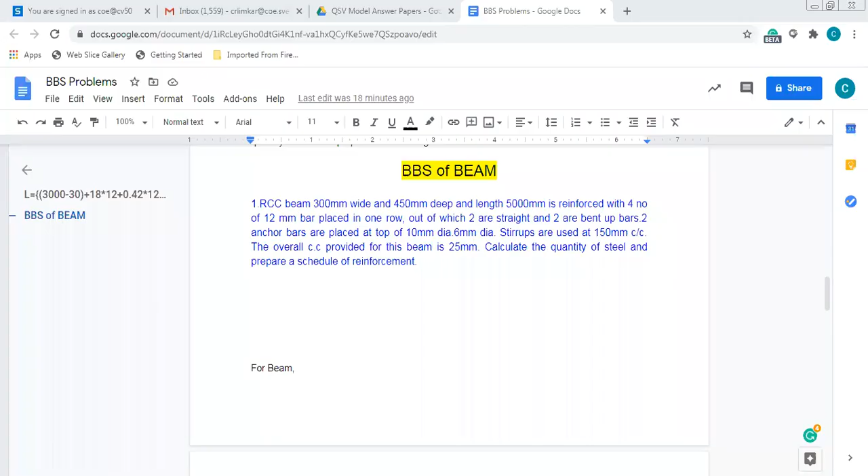An RCC beam 275 mm wide. You can note down this next, second problem, those who have joined the session.

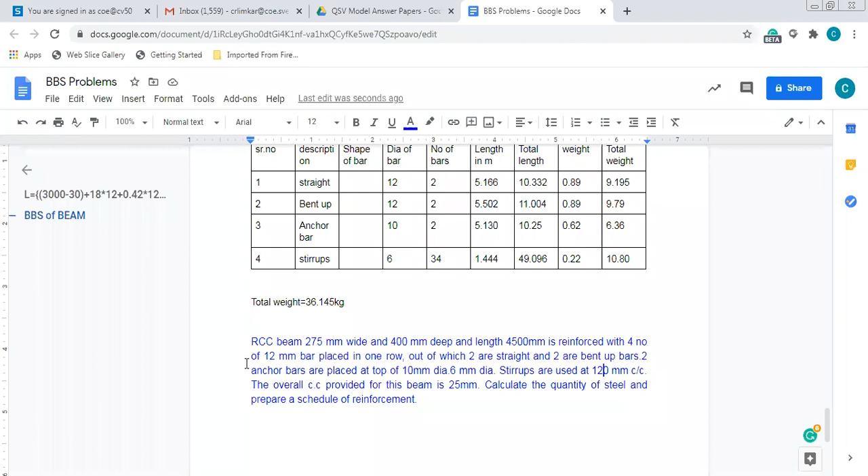So this is your problem number 2. Please note down the problem and try to solve it.

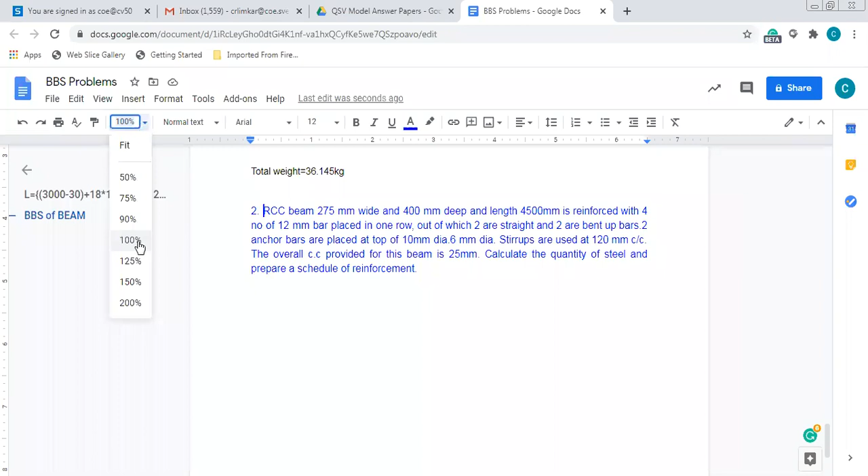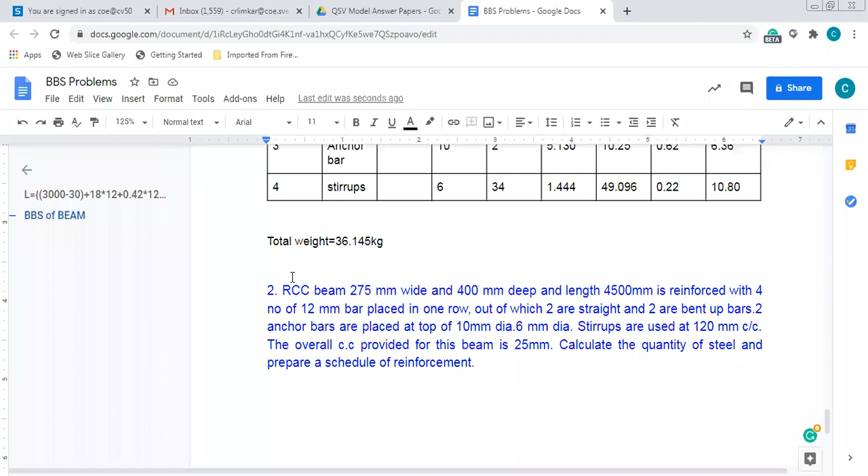An RCC beam 275 mm wide, 400 mm deep, and length 4500 mm is reinforced with four number of 12 mm bars placed in one row, out of which two are straight and two are bent bars. Two anchor bars are placed at the top of 10 mm dia. 6 mm diameter stirrups are used at 120 mm center to center. The overall clear cover provided for this beam is 25 mm. Calculate the quantity of steel and prepare the schedule of reinforcement.

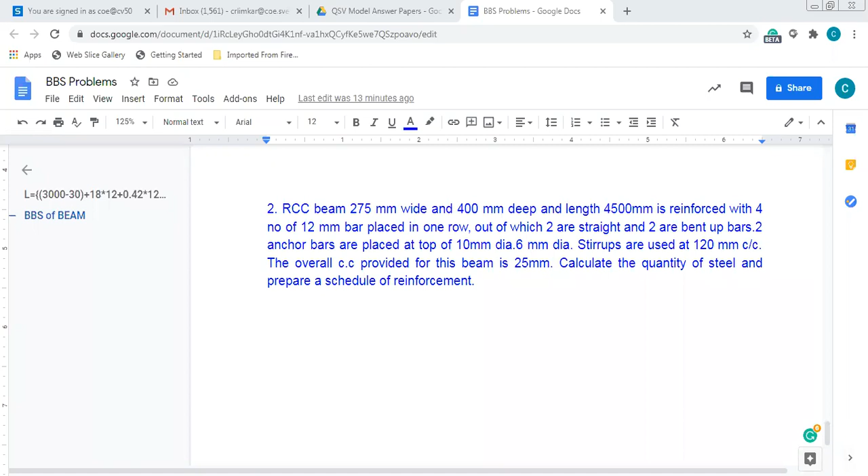An RCC beam, you can note down this problem also. An RCC beam 230 by 300 mm and length 3 meters is reinforced with 3 number of 12 mm main bars placed in one row. Out of 3, 2 are straight and 1 bar is bent up. In addition to this, 2 anchor bars of 10 mm dia are provided at the top. 6 mm stirrups are provided at 150 mm center to center. Clear cover is 20 mm. Calculate the quantity of reinforcement.

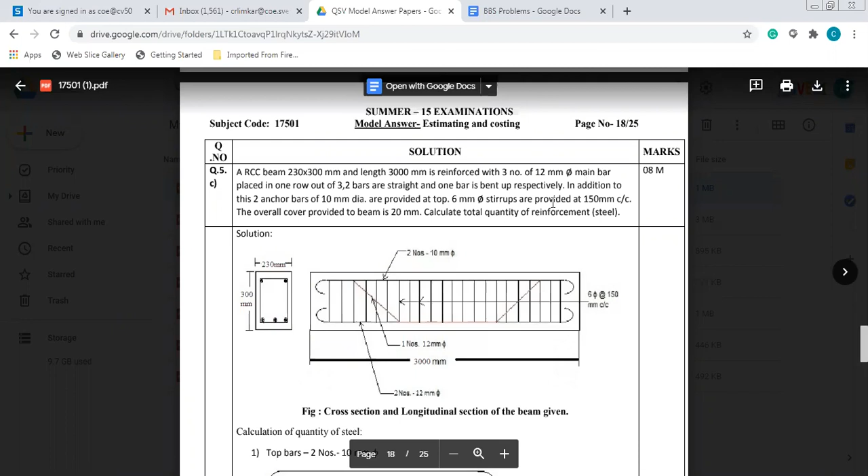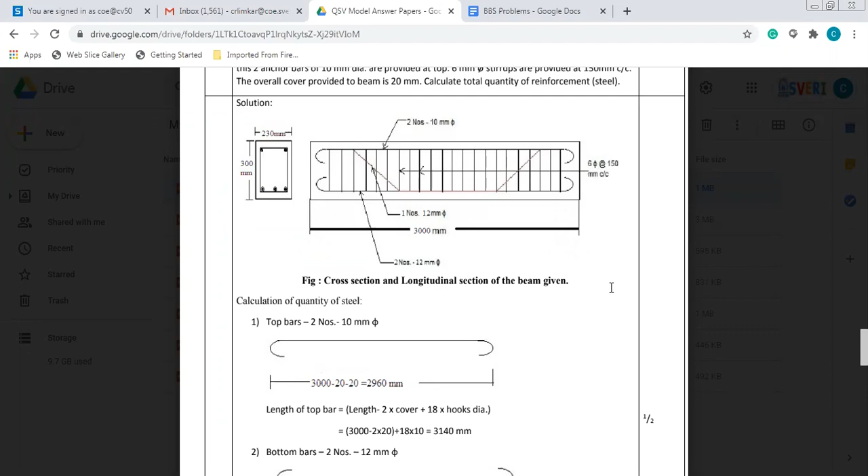I will just cross check. Length of top bar is 3140, correct? Okay. Then bottom bars 3176, correct. After that,

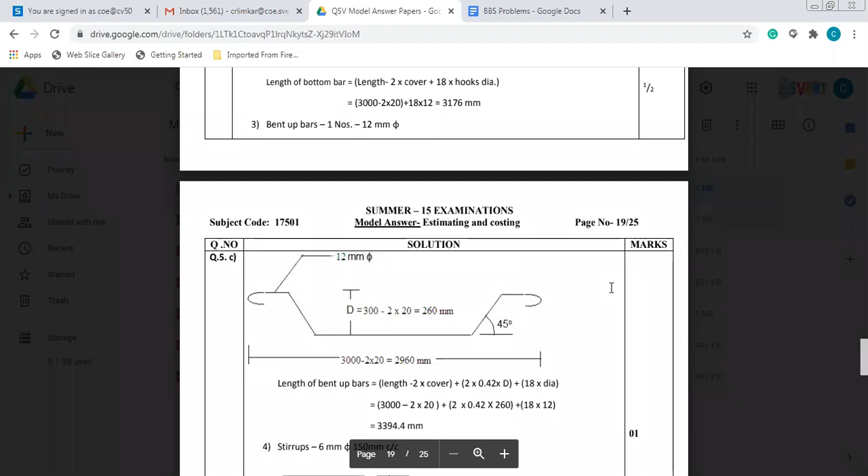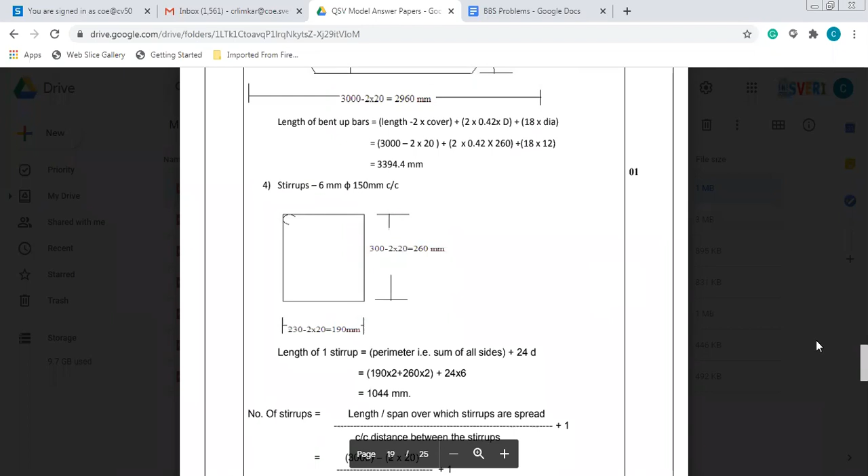Bent up bar's length is 3394.4 mm, you can calculate. Stirrup length is 1044, not 1004. Please check your calculations. And number of stirrups will be 21.

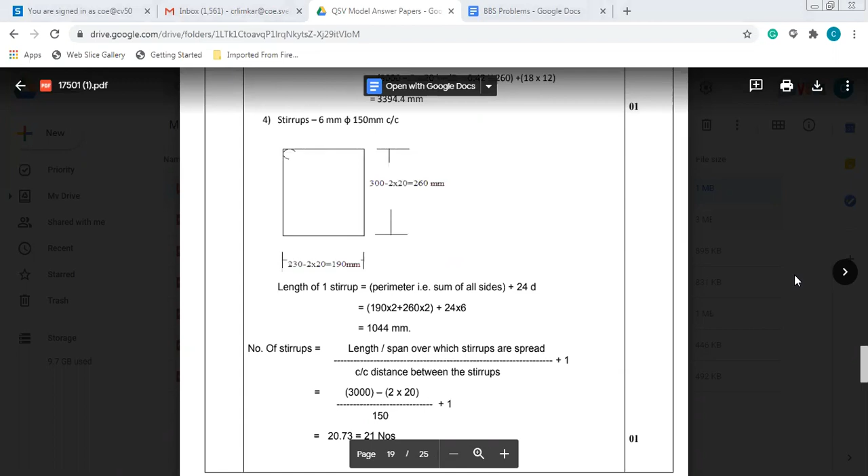That is correct. Okay, total weight of the steel which is required for this particular problem. Everyone, please calculate the total weight of steel which is required.

Calculate the total quantity of steel that is required. Everyone, please calculate the quantity of steel that is required for this problem so that we will proceed further.

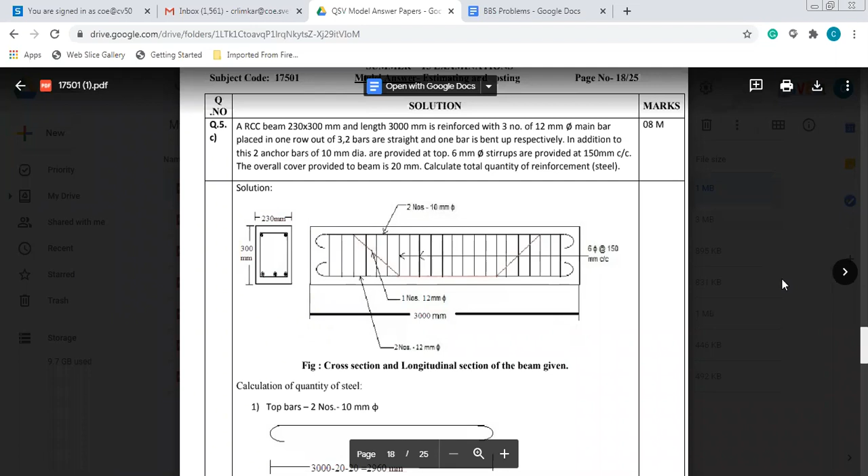Total weight of steel is 17.29 kg. Please check your answer.

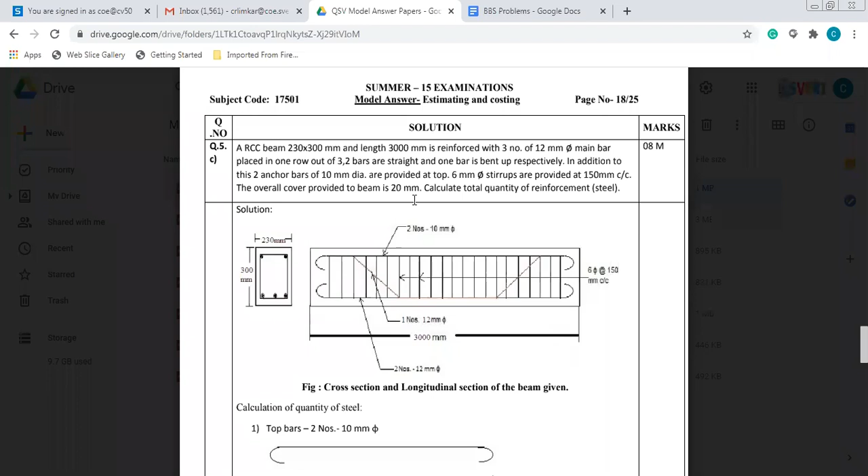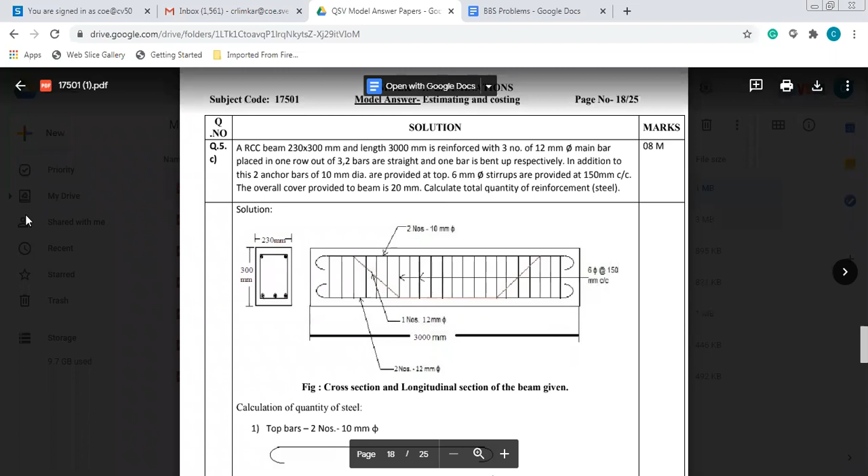I will take the next problem. Okay, I will check whether it is available with you. I will share, don't worry. Wait for me.

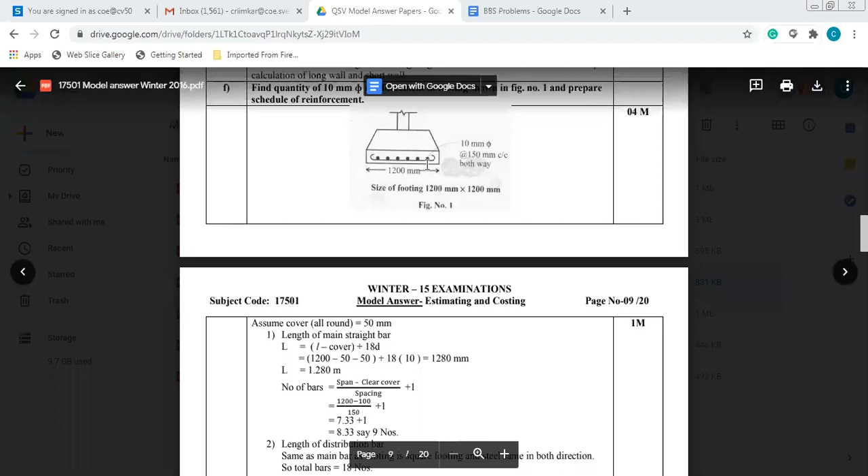Okay, you can note down this next problem, that is of the footing. Find, I will just correlate. Find quantity of 10 mm diameter reinforcement in the footing shown in the figure and prepare the schedule of reinforcement. Now this is the problem related with the footing, that is calculating the quantity of footing.

See, the diagram is given. You can draw the diagram for your ready reference. And we will start with this problem.

There is a footing having the size of 1200 mm by 1200 mm, that is 1.2 meter by 1.2 meter. 10 mm diameter bar is used. Then spacing is nothing but 150 mm center to center, and that is both way. It is been clearly mentioned.

Okay, clear cover. Now as it is a footing, what is the clear cover? You can take the clear cover as around 50 mm. That is being assumed in this particular problem. So clear cover for this footing problem is 50 mm.

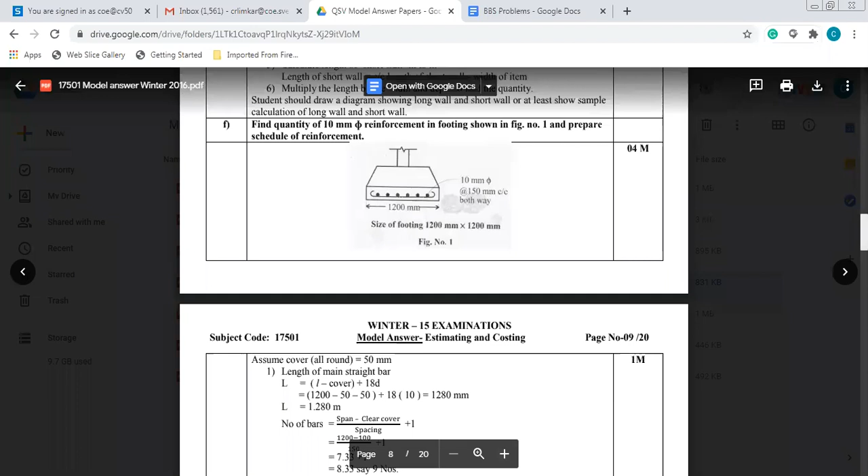Now how to calculate the length of main bars? Length of main bar, again our regular formula, that is for the straight bars. I will use the pointer so that you will understand.

See, length of main bar, this is your main bar. Have you seen this hook is there? This is nothing but your length of main bar. How to calculate this length? Again, use the simple formula.

Length of main bar equals to length minus the clear cover plus 18 into diameter of the bar. Length is 1200 mm, from the diagram you can easily identify it. Clear cover is 50, so 2 into 50 plus 18 into diameter of that straight bar which is 10 mm, as given in the problem. So length of main straight bar is 1280 mm.

That is 1.280 meter. Then number of straight bars that is required. Now how to calculate this number of straight bar, which is mentioned in the next one.

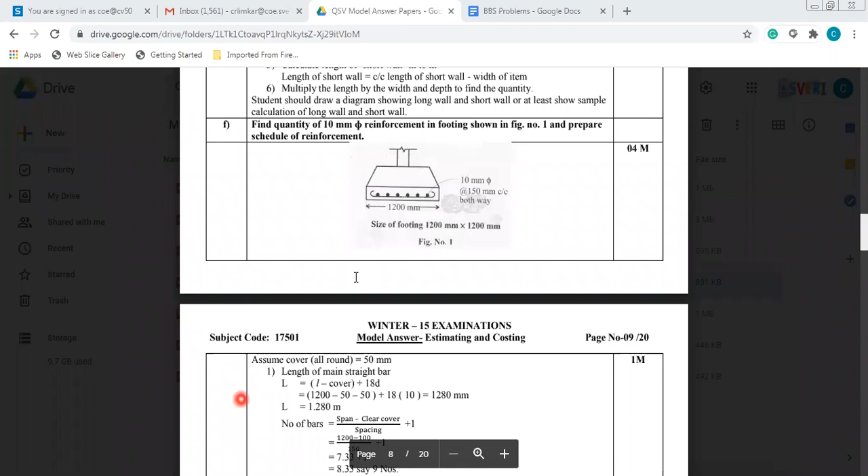Number of straight bars will be equal to span minus clear cover divided by spacing, plus 1. We have already discussed this formula in our previous problems. Total span is 1200 mm, minus clear cover of 50 mm from both sides, that is 2 into 50, divided by spacing. So number of bars comes to 8.33, that is around 9.

Now our next step is to calculate the length of the distribution bar. What will be the length of distribution bar? It is same as the main bar. Why? Because the footing is square and has the same dimensions, 1200 mm by 1200 mm.

So length of distribution bar equals to, again the formula will remain same, length minus clear cover plus 18d. Length is 1200 mm, clear cover is 50 from both sides, plus diameter is 10 mm. So 1200 minus 50 minus 50 plus 18 into 10, that is 1280.

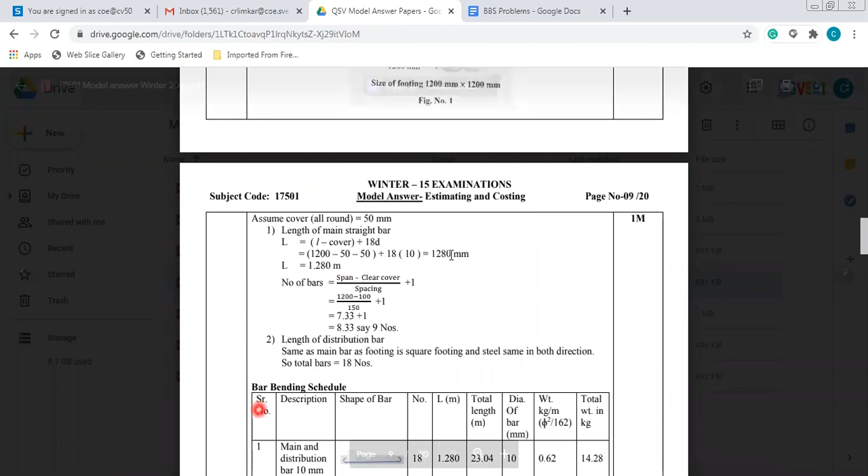So the length of distribution bar will again remain same because it's a square footing, as you can see in the diagram, having the size 1200 mm by 1200 mm. If it is different, then you need to calculate it separately.

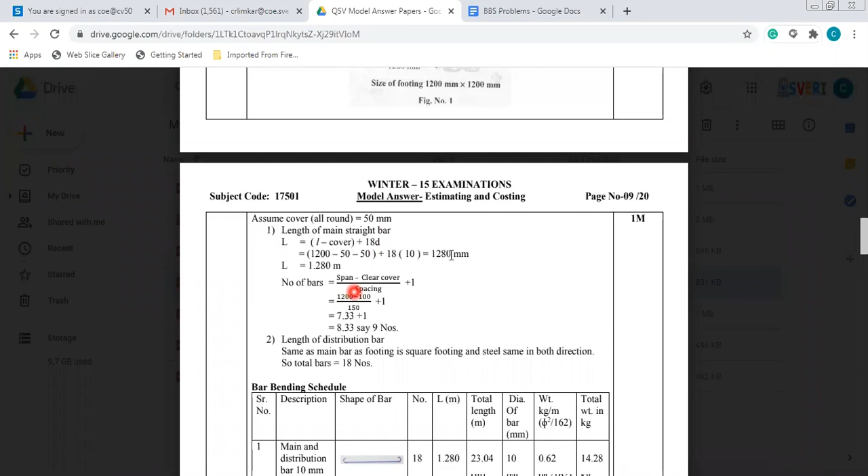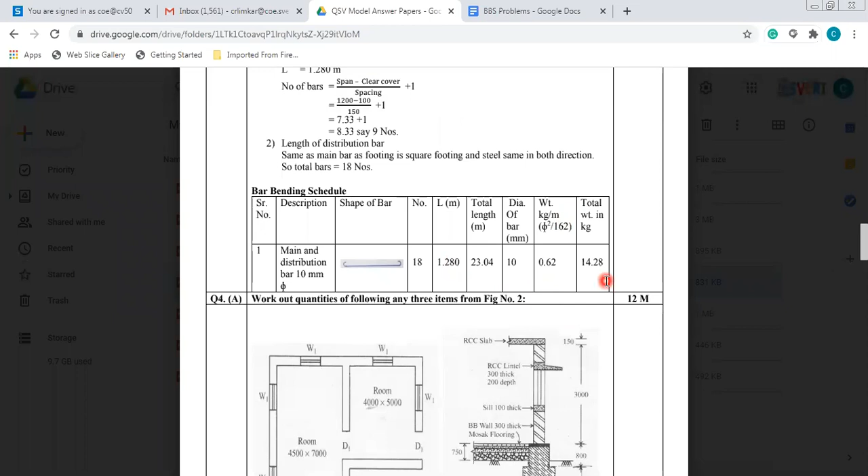So the number of distribution bars will again be same. Total bars used are nothing but 18, that is 9 plus 9. Length is 1.280, total length will be 23.04. Diameter of bar is 10, so weight is 0.62, that is d square by 162, and total weight is 14.28.

It's a simple 4 mark formula which is asked in the examination. So you can note down this simple problem, and in our next lecture we will go for a bigger problem of the footing, preparing the BBS of footing having different sizes. Here it's a square footing and a very simple problem given just for understanding purpose.